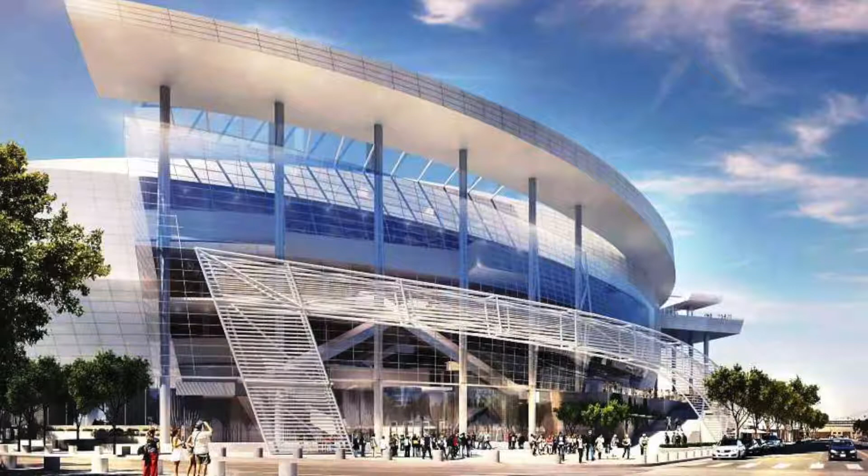Team Floor observed the Chase Center in San Francisco, California via webcam. Observations were done at the end of the day before closing of the site on the particular day of observation. Mortenson Construction and Clark Construction are joint venturing and serve as the general contractors for the Chase Center.

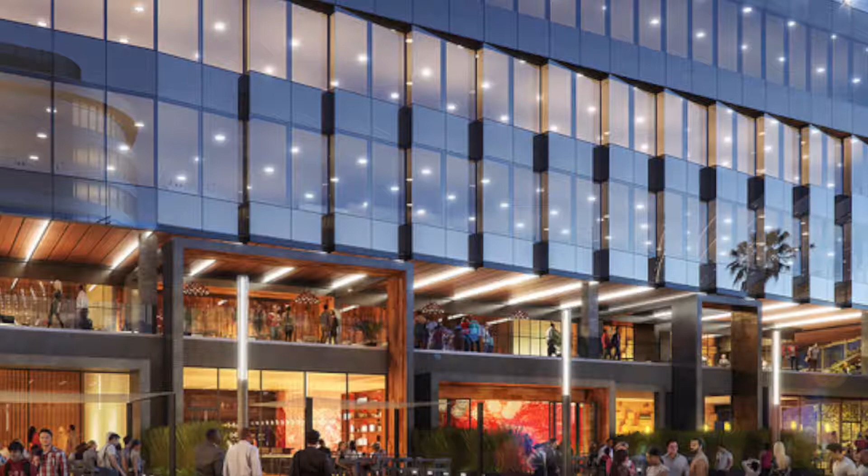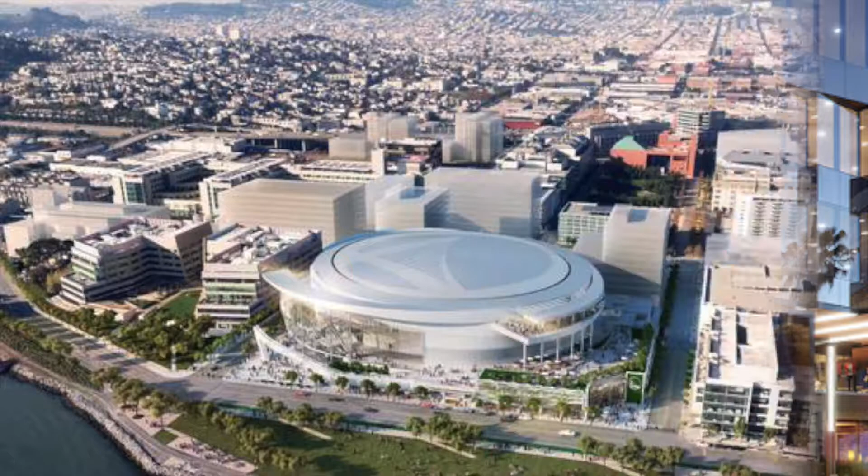The architect on record is Kendall Heaton Associates with office design architects from AE3 Partners. BKF engineers were responsible for civil engineering, land surveying, and planning. The arena will be split into multiple areas: the Plaza District on 3rd Street, waterfront shops, and the Esplanade. Each space will offer guests a different experience.

The Plaza District will provide food, beverage, and retail to visitors. The outside of the waterfront area will serve as a large public park which could potentially be home to restaurants, coffee shops, or retail. The Esplanade will connect these spaces and offer space for hanging out, shopping, and dining.

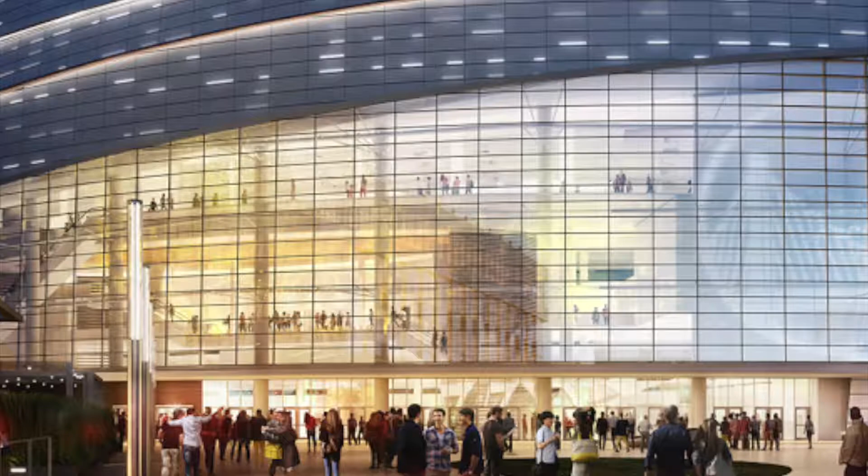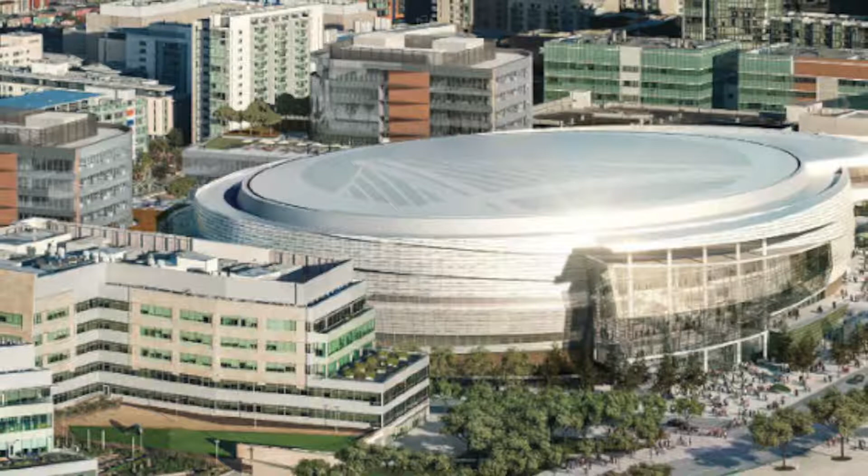The space in total will provide 100,000 square feet of retail, 18,000 arena seats, 3.2 acres of plaza and public space, 950 parking spaces, 300 bike valet spaces, 580,000 square feet of office and lab space, 24,000 square feet of public plaza facing the water, and will host over 200 events a year.

There is one crew member loading a pallet of 16 OSBs onto a telescopic forklift. This task takes 3 minutes to complete. Once the pallet has been placed on the forklift, the operator lifts the material and centers it according to the placement of the tear of the black net. This task takes 1 minute to complete.

There are 4 laborers waiting on the scaffolding for the OSB to arrive. 2 laborers will unload 1 board at a time. The boards that were taken to a further distance took 2 minutes, whereas the boards that were taken to a closer distance took 30 seconds. Overall, unloading the boards from the telescopic forklift took a total of 10 minutes to complete.

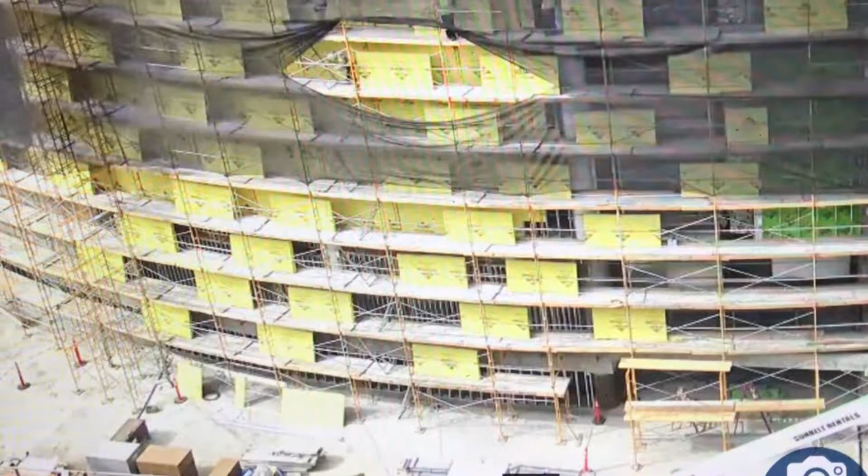Once the boards were unloaded, the forklift operator lowered the forklift back to the ground level. This took 30 seconds. The overall time to complete the cycle was 14 minutes and 30 seconds. The site conditions during the observation were clear. The weather of 60 degrees Fahrenheit and a wind of 10 miles per hour allowed the work to proceed both efficiently and effectively.

The footage that was observed was focusing on a facade that is under construction. There is currently OSB being placed on the facade. About 3/4 of the facade is complete. This area of the site has scaffolding and a black net on the perimeter of the building. The scaffolding allows crew members to work safely throughout the day as they unload and place the OSB on the facade. The black net helps during bad weather conditions. For instance, it prevents wind from blowing the OSB away and it shields rain from wetting the material.

In addition, the crew members have used a technique with the black net. As seen from the footage, there is a large tear on the net that allows the telescopic forklift to place the OSB for the crew members to unload. On every other floor, there is a similar opening located in the same area. The reason for this is so the telescopic forklift does not have to move locations.

There are 2 major issues in the current operation. Unloaders are not very productive. They are idle for 4.5 minutes of the 14.5-minute cycle. This means that they are only productive 69% of the time. In this operation, they cannot do anything while the forklift is being loaded and while it is rising and lowering to the ground.

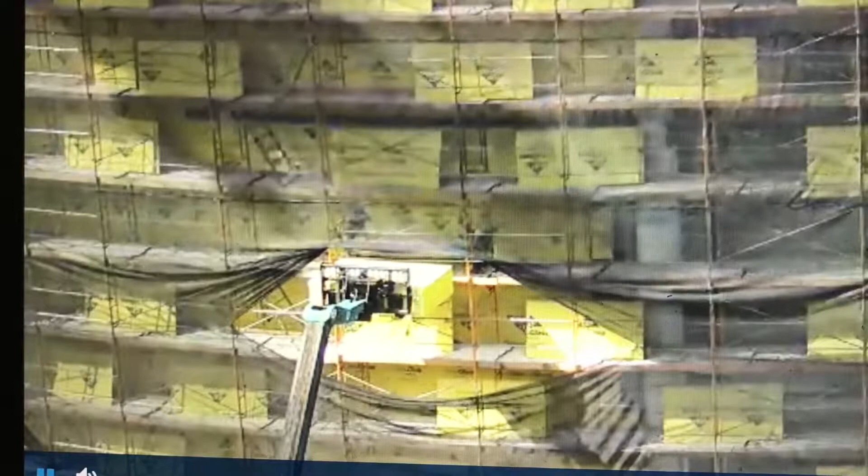Additionally, some boards need to be carried long distances, and it takes a long time to unload and carry the OSB boards and to return to the forklift. Half of the OSB boards take 2.5 minutes each to unload compared to the boards that only take the unloaders 30 seconds to unload. To combat these problems, we propose solutions that involve adding another telescopic forklift, adding more unloaders, and changing the locations of the forklifts.

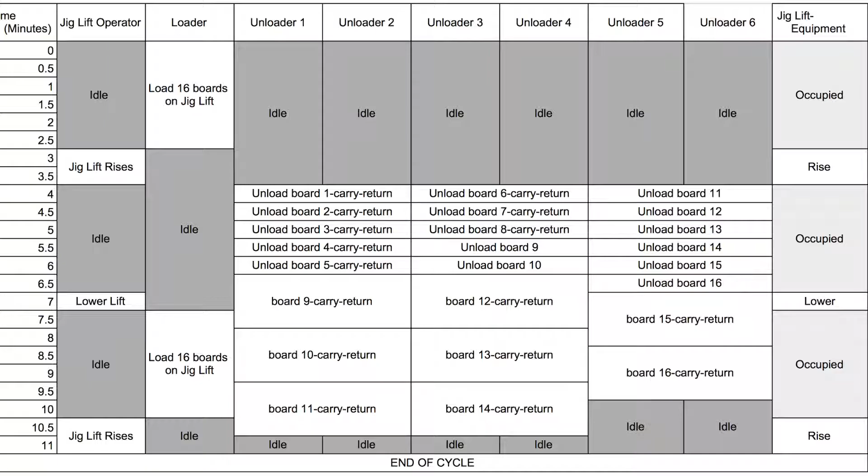These changes lead to increased productivity. Proposal number 1. In this crew breakdown scenario, like the existing operation, there is 1 forklift operator, as well as 1 loader. However, we propose that having 6 unloaders will increase efficiency as opposed to having only 4.

The lift in this proposed scenario is also in the same location as the forklift in the existing scenario. This means that once the forklift is loaded and rises to the level at which the OSB boards need to be unloaded, there is 1 location very near the unloading area that needs 8 of the 16 OSB boards and 1 location that is further away from the unloading location that needs the other 8 of the 16 boards.

For this reason, unload carry return time for 8 of the OSB boards is significantly shorter than the same process for the other 8 OSB boards. In order for one board to be successfully unloaded and carried to the appropriate location, 2 unloaders are needed per board unload carry. In the existing breakdown with just 4 unloaders, the overall time it takes for one cycle to be completed is 14 minutes, with 16 boards having been moved to the designated floor.

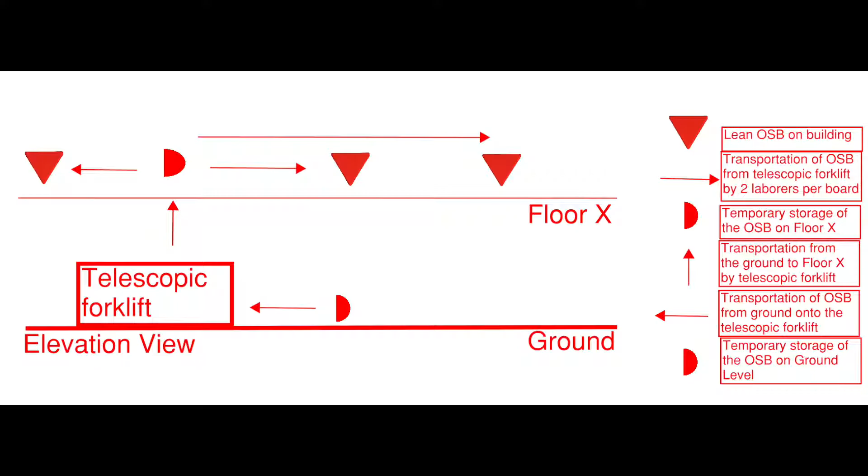This is because until the OSB boards are completely unloaded, the lift operator and loader have no choice but to remain idle. Therefore, the goal is to decrease the time that the unloading process takes. Less time unloading means less time the equipment and workers have to be idle. Adding 2 more unloaders would help accomplish this goal without incurring too significant of a cost increase. This proposed operation finishes one cycle in 11 minutes, and 16 boards are moved to the upper floor.

This is Proposal 2. In the existing operation, the unloaders have significant idle time. We propose adding a second telescopic forklift in the same location as the first telescopic forklift. While this will be a significant initial cost, we believe that the increased productivity will save money. With both forklifts in the same location, it will be a simple change as the OSB boards will be temporarily stored and loaded in the same area.

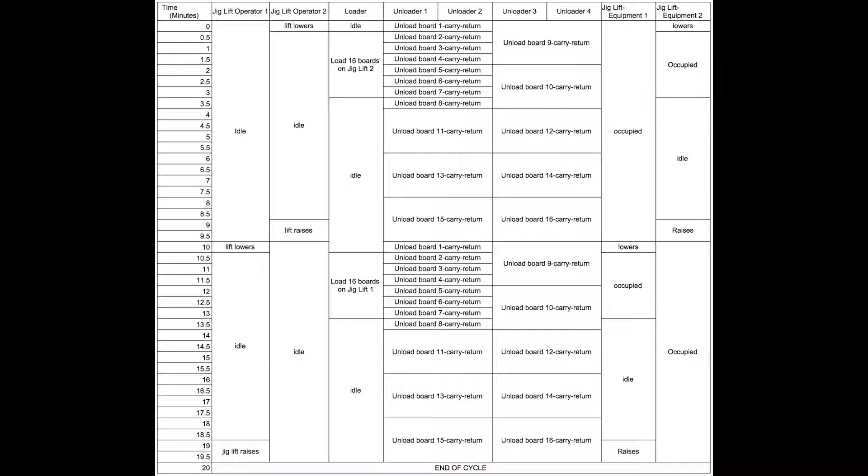Additionally, we know the ground and area is a safe and clear space, as this is where the first forklift is located. With the additional forklift, there will be an additional operator. There will still be 1 loader who assists in the forklift operation and 4 unloaders on the upper floor to unload the OSB boards on the forklift. The unloaders work in pairs to unload the 16 OSB boards off of the first forklift. They move the first 8 OSB boards to nearby areas. Then they move the next 8 to farther areas.

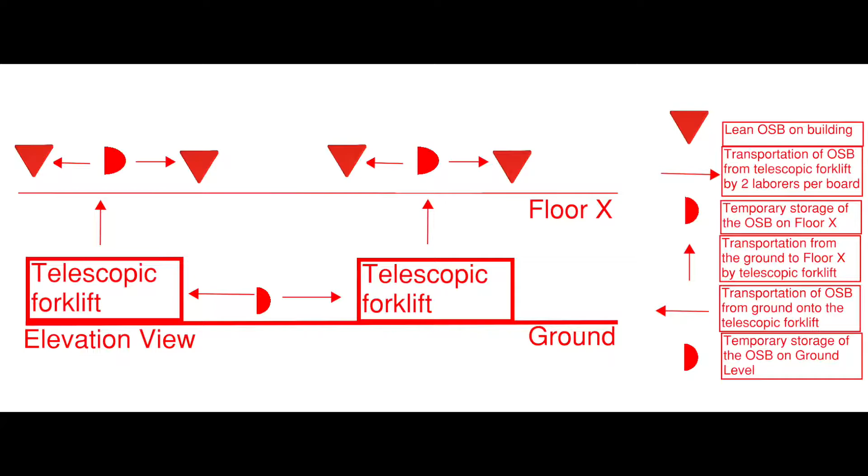Meanwhile, the second forklift lowers and the loader loads the second forklift. The second forklift will rise to the second level right when the first forklift is completely unloaded. The unloaders will work to unload the second forklift in the same manner as the first forklift. Meanwhile, the first forklift lowers to the ground, and the loaders load the first forklift to prepare it for the next cycle. Finally, the first forklift rises to the upper floor right as the unloaders finish unloading the second forklift. The unloaders have no idle time in this proposed operation. The proposed operation finishes one cycle in 20 minutes, and 32 boards are moved to the upper floor.

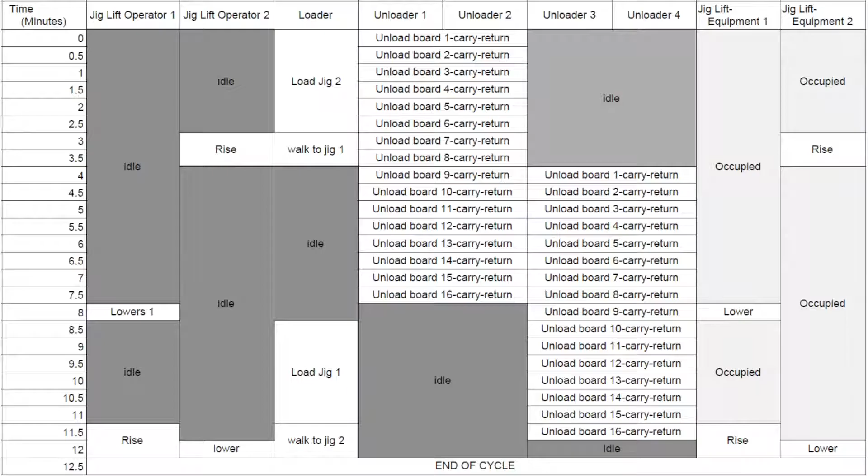Proposal 3 is similar to Proposal 2. Again, we propose adding the second telescopic forklift to reduce the idle time of the unloaders. However, this time we propose having the forklifts at different locations around the building. The 2 different locations mean that the OSB boards do not need to be moved as far. The unloaders will have a smaller distance to walk with the boards, decreasing the unloading time significantly. All boards will take 30 seconds to unload, compared to the original operation where some boards took 2 minutes. However, there will be more preparation required.

The location of the second forklift will need to be approved and prepared. Additionally, the OSB boards will need to be temporarily stored in both locations of the forklifts. There will be 2 telescopic forklifts, 2 operators, 1 loader, and 4 unloaders.

Unloaders 1 and 2 begin to unload 16 OSB boards from the first forklift. Each board only takes 30 seconds, as they only need to move them right next to the forklift. Meanwhile, the loader is loading the second forklift. Once the loader finishes, the second forklift rises and the loader walks over to the first forklift.

Unloaders 3 and 4 begin to unload 16 OSB boards from the second forklift. Unloaders 1 and 2 finish unloading the first forklift, and the forklift can lower to the ground. The loader loads the first forklift as unloaders 3 and 4 still continue to unload the second forklift.

Unloaders 3 and 4 finish unloading, and the loader finishes loading the first forklift at about the same time. The second forklift lowers to the ground as the first forklift rises. This proposed operation finishes one cycle in 12.5 minutes, and 32 boards are moved to the upper floor.

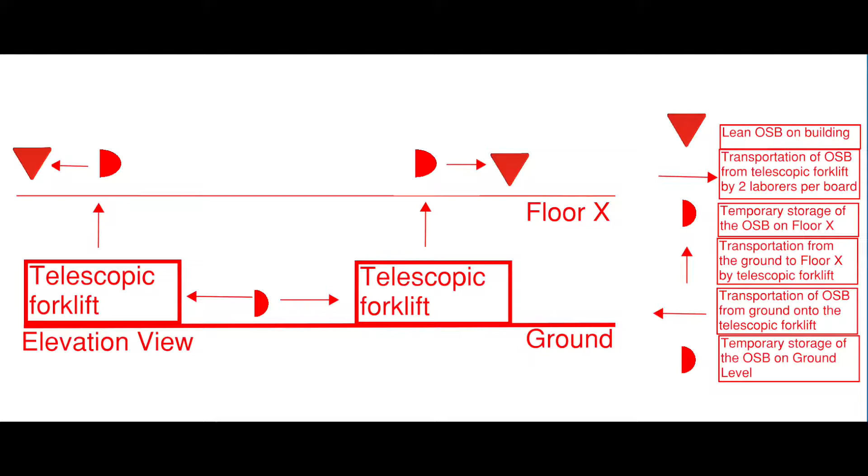For the labor costs, it was necessary to divide the costs into 3 separate sections. We have the equipment, the crew, and the material. RSMeans 2016 was utilized to find the daily unit cost per worker and the telescopic forklift to calculate our total cost. Of course, we have to take into consideration the several factors that must be implemented. The first one being the labor factor.

The labor factor is a combination between the labor overhead and the city index of installation. For the labor overhead, it was necessary to find the bare cost and use the workers' compensation percentage, the average fixed overhead percentage, and the overhead percentage, and then use it to calculate a labor factor that will be multiplied by the bare cost to give us a total wage.

Then we take the total wage of all the workers together and divide it by the bare cost to obtain our labor overhead. The city index factor we obtain directly from RSMeans. For the equipment, we use RSMeans as well for the city index of installation, which is the only factor for equipment. In the case of materials, we also use the city index factor for materials from RSMeans.

This will be multiplying our total cost of all the materials that we use per cycle to obtain our final value that has the implementation of the factors. Then we will add the three of them together, the equipment, the crew, and the material, to obtain a final cost. This final cost can then be simplified into a unit cost for facilitation. All the daily unit costs from all the workers were turned into unit cost per minute to facilitate the calculation, since our cycle times were done in minutes.

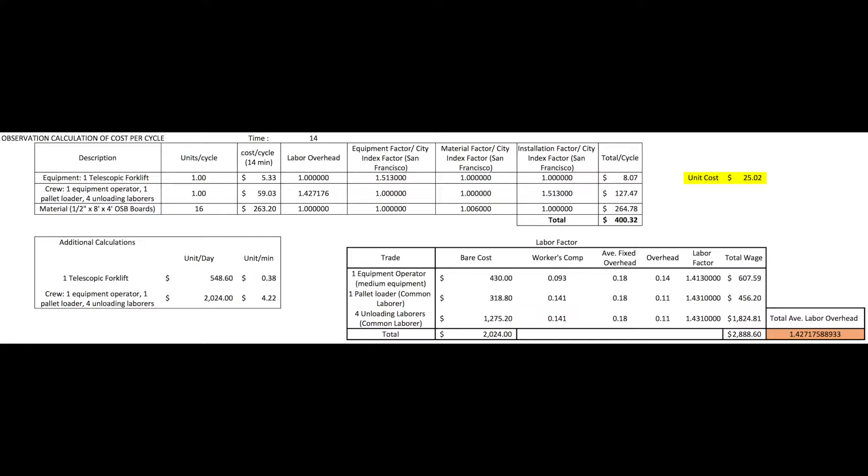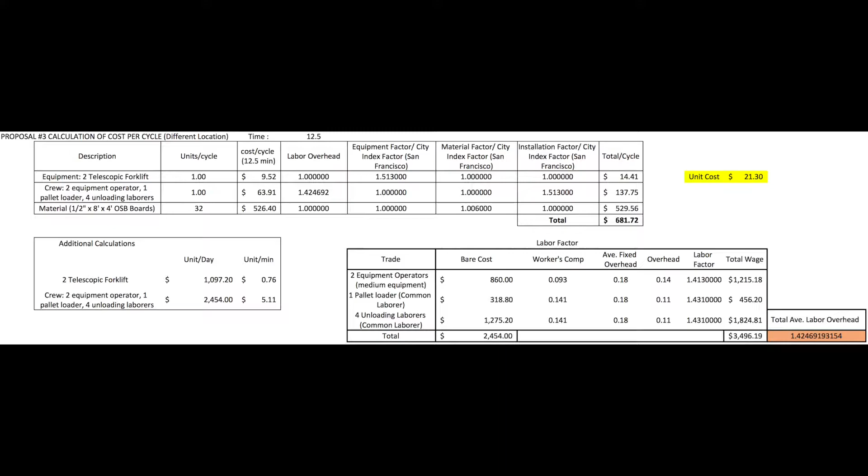For the observed cycle, the unit cost per board was calculated to be $25.02. For proposal number 1, the cost was $25.57. For proposal number 2, the cost was $24.16. And for proposal number 3, the cost was $21.30. In the calculations, it was determined that proposal number 3 is the best option to implement, since it has the lowest unit cost and had a shorter time per cycle than the observed cycle.

Proposal number 3 has 2 telescopic forklifts, which means that equipment and materials around the project site will have to be moved. For example, there are 2 dumpsters next to the structure, which will need to be moved in order for the forklift to get close enough to the building.

It is important to have the materials accessible to save time by allowing equipment to maneuver so that materials can be supplied quickly and efficiently. In order to accomplish this, a worker will be assigned to observe and maintain organization of the materials in this area.